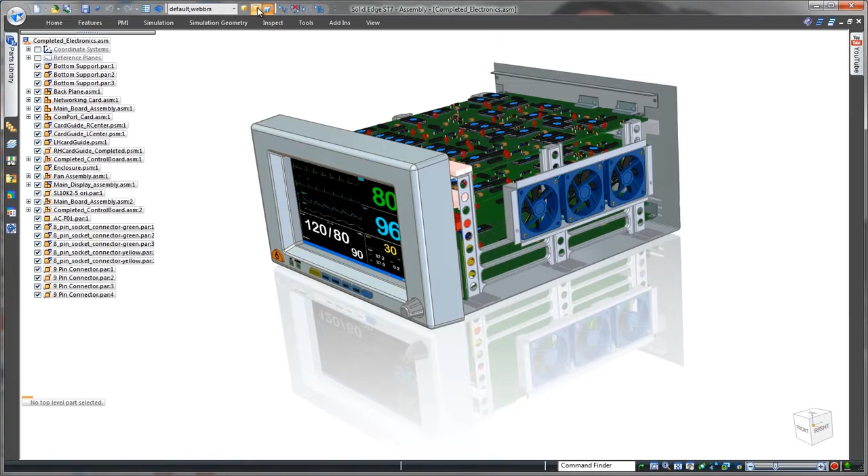We'll use Solid Edge to complete the enclosure of this heart rate monitor. Solid Edge with synchronous technology excels in sheet metal construction, allowing designers to efficiently work with surrounding components to define external product housings.

In most CAD systems, the user has to modify a part independently from the overall product assembly. With Solid Edge, additional flanges can be created at the top-level assembly just by selecting and dragging the plate's thickness faces. No special command necessary.

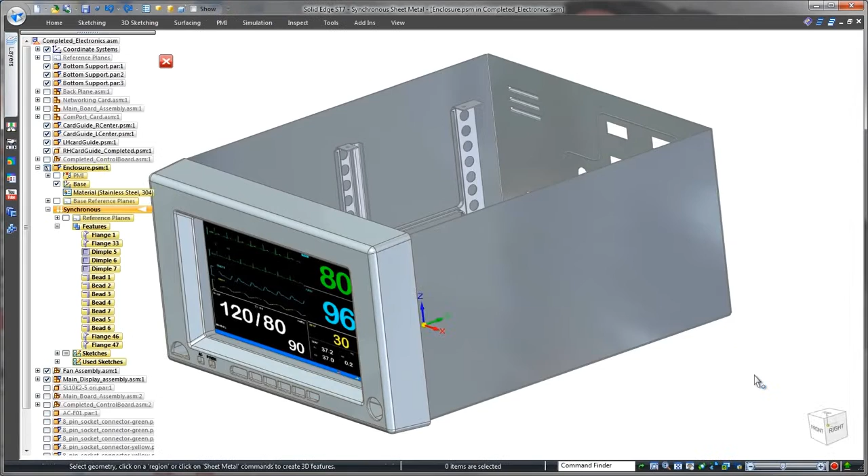Medical device manufacturers must adhere to strict government regulations, and any gaps between panels could be faulted. Using the close corner command, these gaps are eliminated.

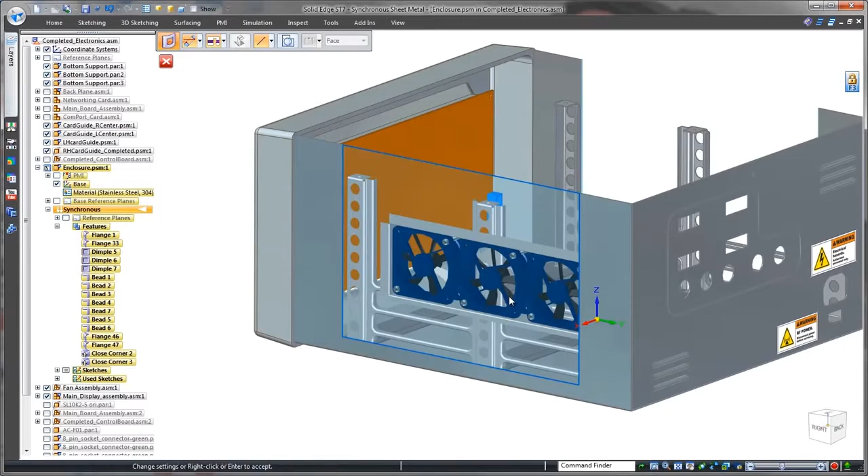The internal circuitry produces a large amount of heat, so normal operation of this monitor relies on cooling fans. To provide clearance for airflow, we'll define rectangular cuts on both sides of the enclosure. Synchronous modeling provides several methods to intuitively match the size of these openings to the shape of the fan assembly. Now that was fast and easy.

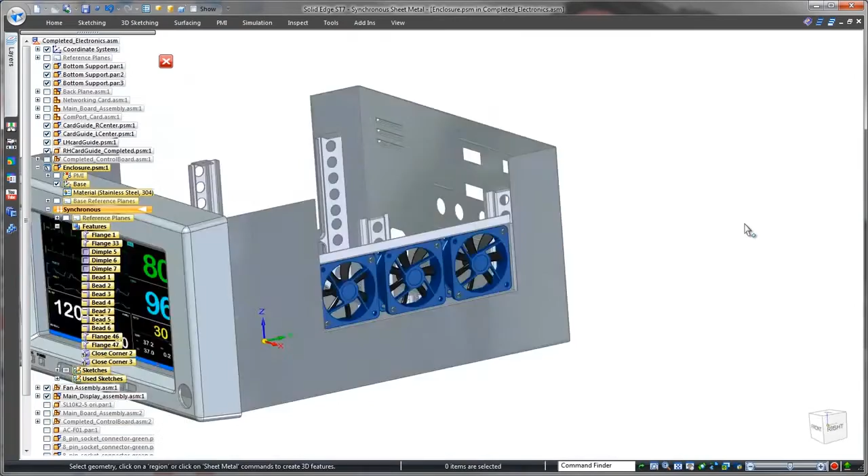Next, we need to create a locking tab for the enclosure's lid. Here we'll select the thickness face, but opt for a partial flange to create this tab. Using one of many handy options, we'll ensure its top is flush with the top of the part.

We'll lock in a precise tab location using 3D dimensions. To meet safety requirements, simple rounds will remove sharp corners.

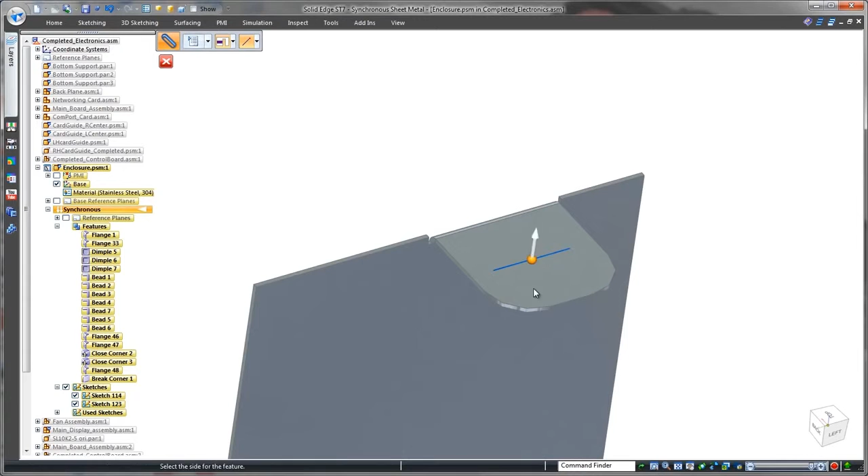The locking tab requires a starting slot, and Solid Edge needs only a sketch line to create the slot. We'll place a hole in the slot to complete the locking tab.

We get the required clearance between the top of the locking tab and the lid by pushing the tab's top face deeper into the part. Another modification made easy. The locking tab needs to be stiffened, so we'll use the gusset command.

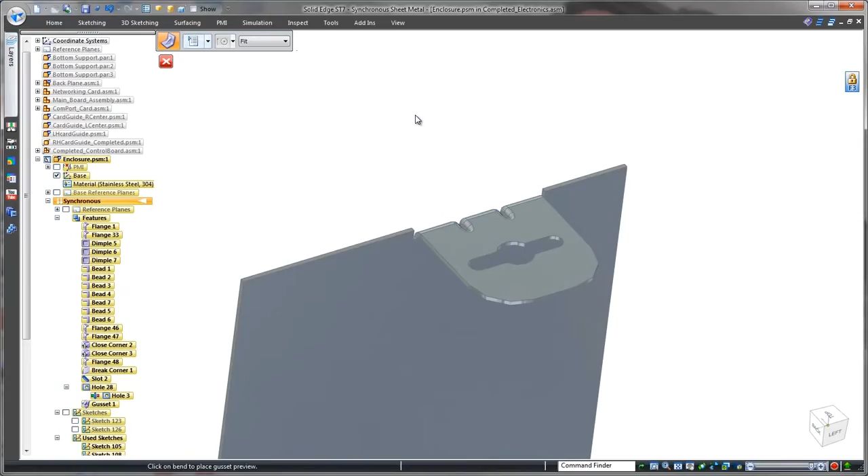Simply specify 2 gussets and Solid Edge automatically computes the spacing between them. Since an identical tab is needed to lock the lid on the opposite side, we'll quickly fence select and mirror these features to the other side.

This completes the design of the enclosure's base.

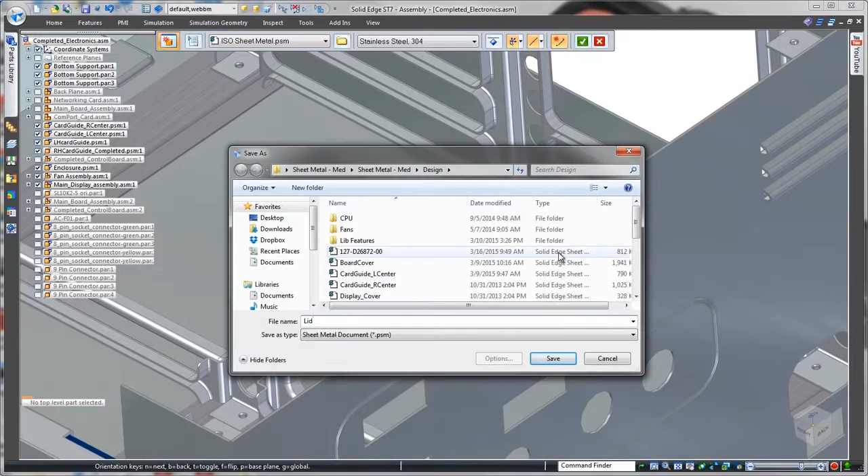Now we'll create the lid. This is where the power of Solid Edge top-down design is realized. By constructing our housing in the context of surrounding components, we can ensure all holes align and mating parts match the first time, avoiding costly rework and eliminating scrap.

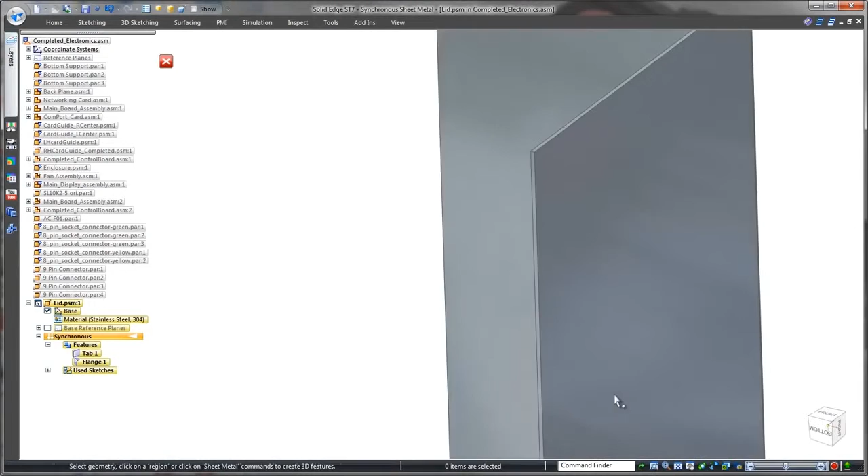As before, we'll create a new flange just by dragging the lid panel's thickness face to the length we need. On the front of the lid, we need a flange that wraps to the underside of the control panel.

The contour flange command not only creates a more complex flange that will fit just right, it also allows us to close the inside corners too.

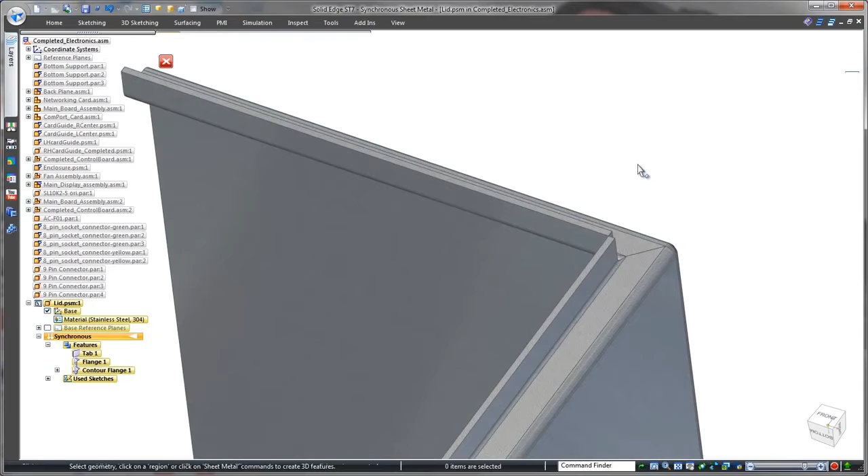Notice this bend radius doesn't match the rounded corner of the control panel. No need to access the history tree, just select the bend and change the radius. Again, that was easy. Remember the fans?

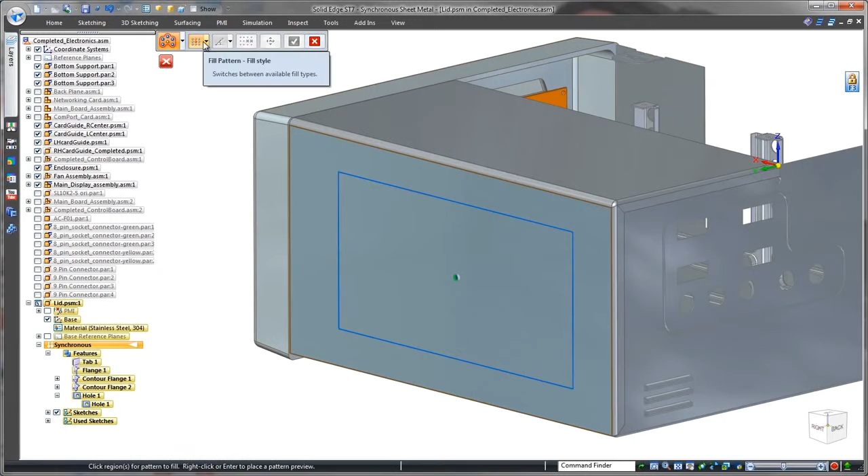Proper operation will require a vent on the side of the lid. We'll create this vent by sketching a rectangle to define the vent's extent and patterning a hole using the fill option. It's as simple as that.

Notice that we have an interference problem between the lid and the front of the control panel. Applying a synchronous relationship will move the vertical flange flush with the control panel's thickness face. That was an easy fix.

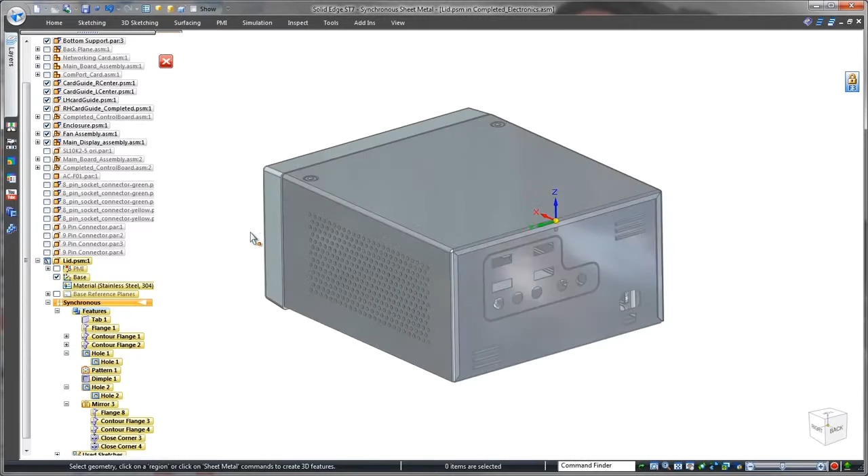We'll finish the enclosure by mirroring this lid half around the thickness face of the part. Solid Edge facilitates creation of manufacturing information, often with little user intervention. Watch as we automatically derive a bend table from the lid model.

Finally, we'll generate a flat pattern for use in a downstream manufacturing drawing. In this case, we'll insert the bend table and add a few coordinate dimensions.

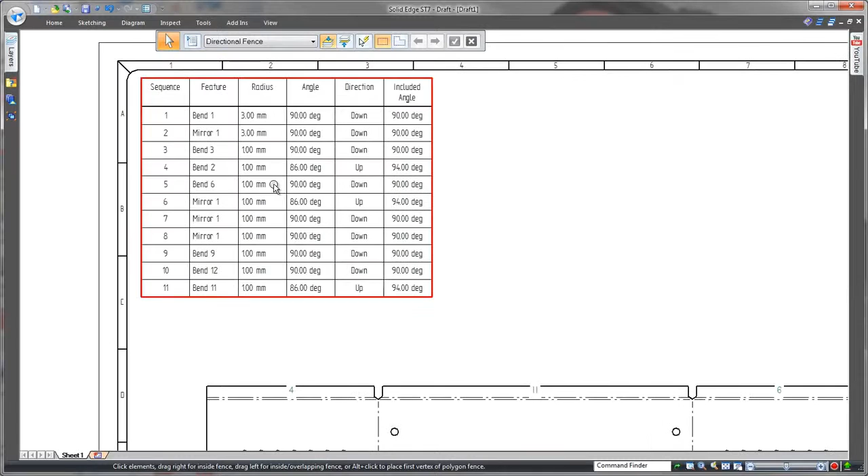Direct interaction with surrounding geometry, coupled with industry-leading sheet metal design tools and innovative modeling capabilities, makes Solid Edge the choice for companies looking for an edge over the competition.

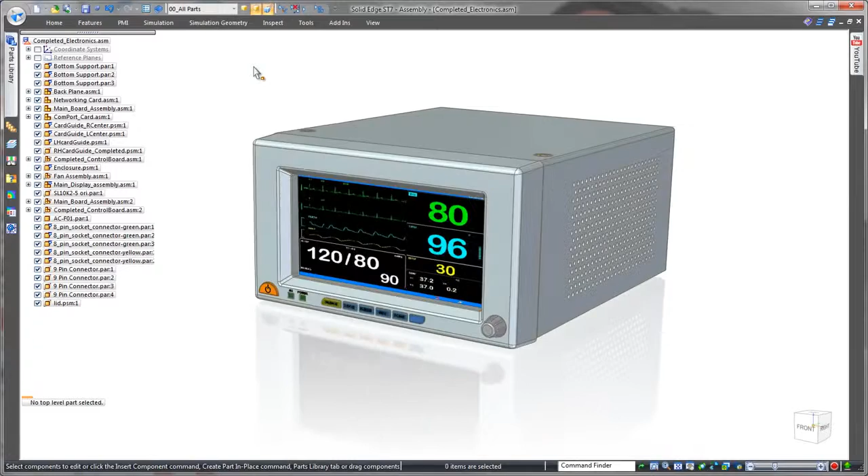Solid Edge. Design better.